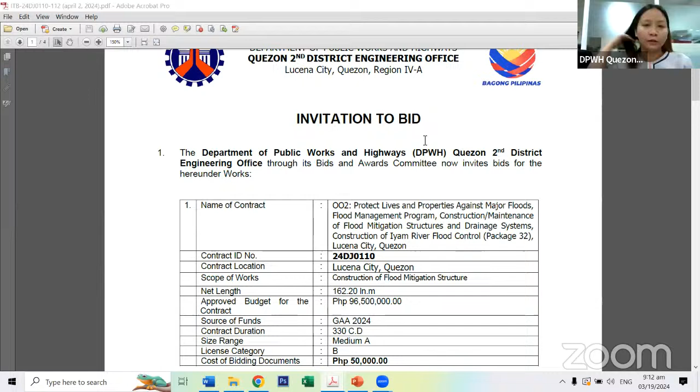Good morning again. First project, 002, Protect Lives and Properties Against Major Floods Management Program, Construction and Maintenance of Flood Mitigation Structures and Drainage Systems, Construction of Iyam River Flood Control, Package 32, Lucena City, Quezon. Contract ID number 24DJ0110. Scope of works: construction of flood mitigation structure.

Net length, 162.2 linear meters. Approved budget for the contract, 96,500,000 pesos. Source of funds, GAA 2024. Contract duration, 330 calendar days. Size range, medium A, license category B. Cost of bidding documents, 50,000 pesos.

Contract profile for 24DJ0110. Major categories of work are FCSPS, dimension 162.2 linear meters. Cost estimate for major category, 96,500,000 pesos. Similar major categories of work are RCSPS, FHR, PHC, FHD.

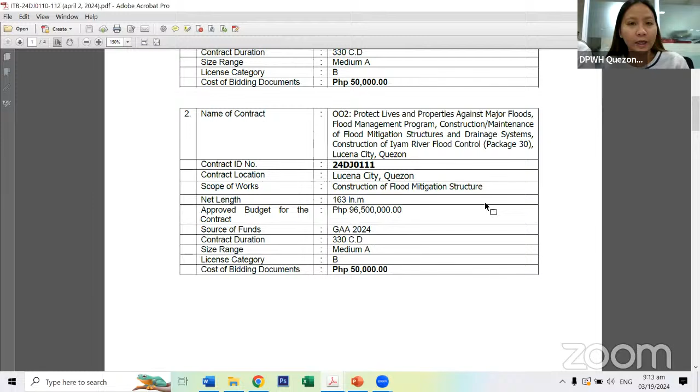Next project, 002, Protect Lives and Properties Against Major Floods, Flood Management Program, Construction Maintenance of Flood Mitigation Structures and Drainage Systems, Construction of Iyam River Flood Control, Package 30, Lucena City, Quezon.

Contract ID number 24DJ0111. Scope of works: construction of flood mitigation structure. Net length, 163 linear meters. ABC, 96,500,000 pesos. Source of fund, GAA 2024. Contract duration, 330 calendar days. Size range, medium A. License category B. Cost of bidding documents, 50,000 pesos.

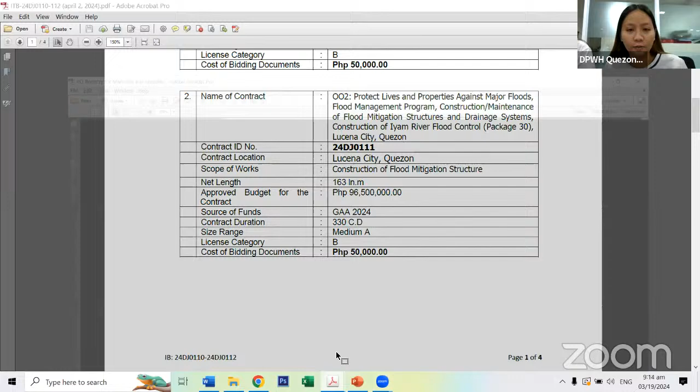Contract profile for 24DJ0111. Major categories of work, FCSPS. Dimension, 163 linear meters. Cost estimate for the major category, 96,500,000 pesos. Similar major categories of work: RCSPS, FHR, PHC, FHD.

Last project, 002, Protect Lives and Properties Against Major Floods, Flood Management Program, Construction Maintenance of Flood Mitigation Structures and Drainage Systems, Construction of Iyam River Flood Control, Package 31, Lucena City, Quezon.

Contract ID number 24DJ0112. Scope of works: construction of flood mitigation structure. Net length, 163 linear meters. ABC, 96,500,000 pesos. Source of fund, GAA 2024. Contract duration, 330 calendar days. Size range, medium A. License category B. Cost of bidding documents, 50,000 pesos.

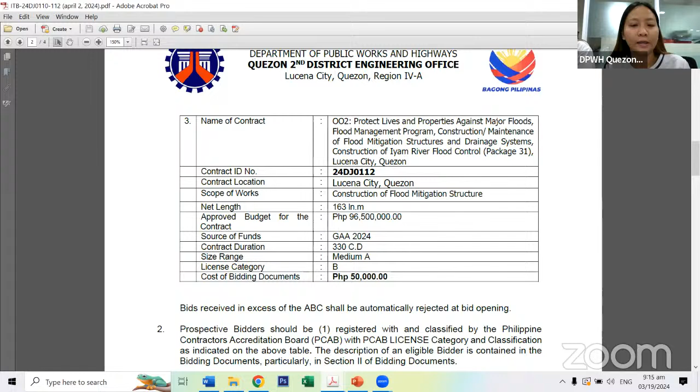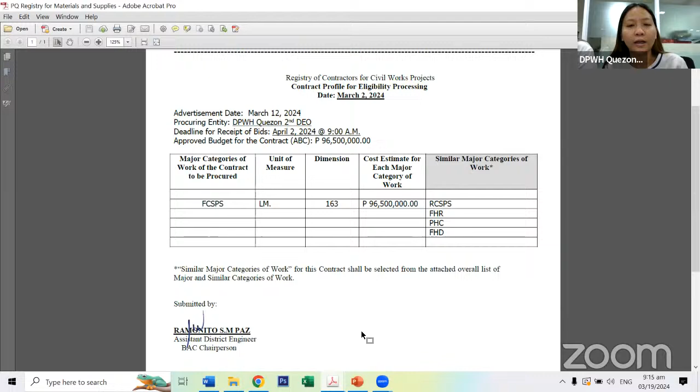Contract profile for 24DJ0112. Major categories of work, FCSPS. Dimension, 163 linear meters. Cost estimate for the major categories of work, 96,500,000 pesos. Similar major categories of work: RCSPS, FHR, PHC, FHD. Opening date, April 2, 2024 at 9 a.m.

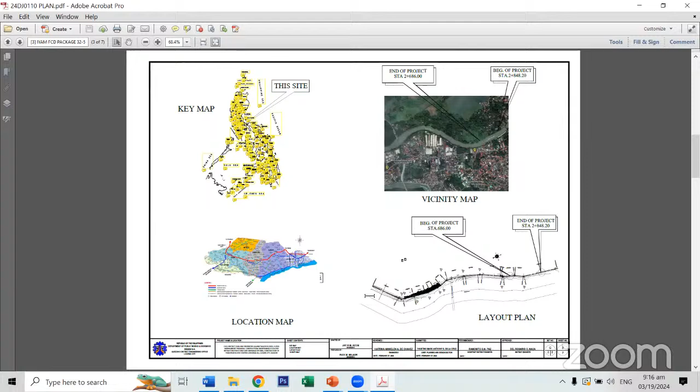The scope of works. Under Part A, facilities for the engineer, we have construction of field office for the engineer, provision of furnitures, fixtures, equipment, and appliances for the field office for the engineer, provision of field office staff for the assistance to the engineer, and provision of progress photographs.

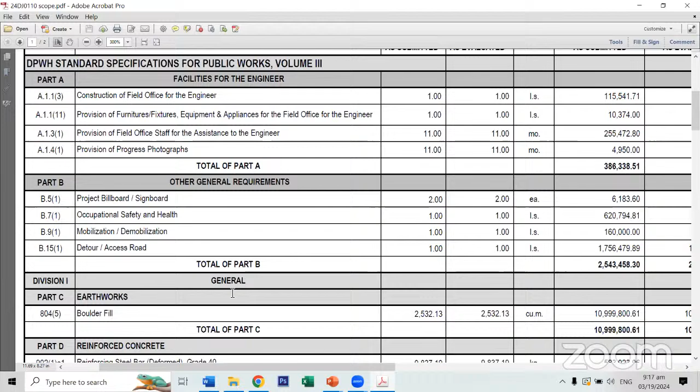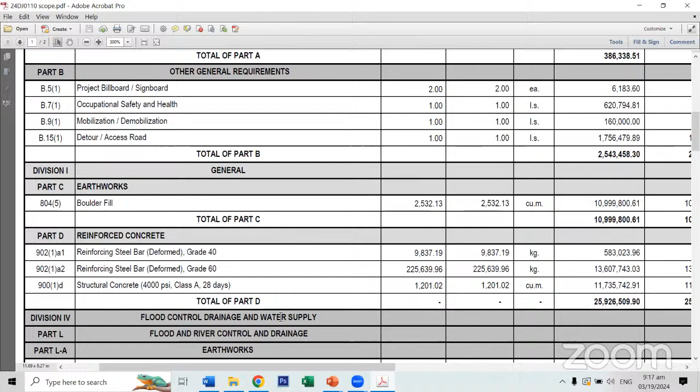Under Part B, other general requirements, we have project billboard, signboard, occupational safety and health program, mobilization, demobilization, detour access roads. Under Division 1, General, Part C, Earthworks, we have boulder fill.

Under Reinforced Concrete, we have Reinforcing Steel Bar Grade 40 deformed, and Reinforcing Steel Bar Grade 60 deformed, and Structural Concrete, 4,000 PSI, Class A, for 28 days.

Under Division 4, Flood Control, Drainage, and Water Supply, Part L, Flood and River Control and Drainage, Earthworks, we have clearing and grubbing, unsuitable excavation, structural excavation for common soil, gravel fill, shoring, cribbing, and drain excavation, cribbing, coffer damming, and embankment from borrow.

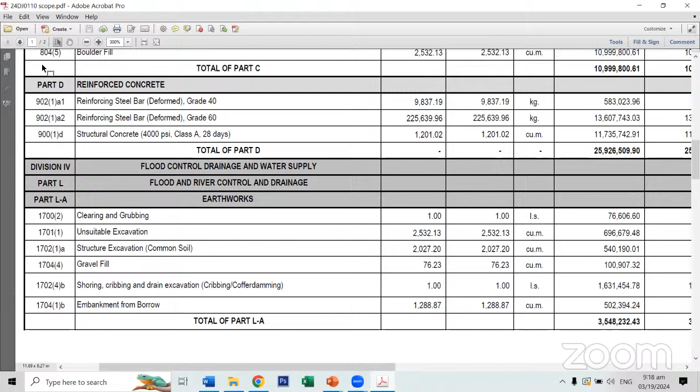For bank and slope protection, we have stone masonry, structural steel sheet piles furnished, and structural steel sheet piles driven. Under drainage work, we have pipe culverts, 910 millimeter diameter, Class 2 RCPC.

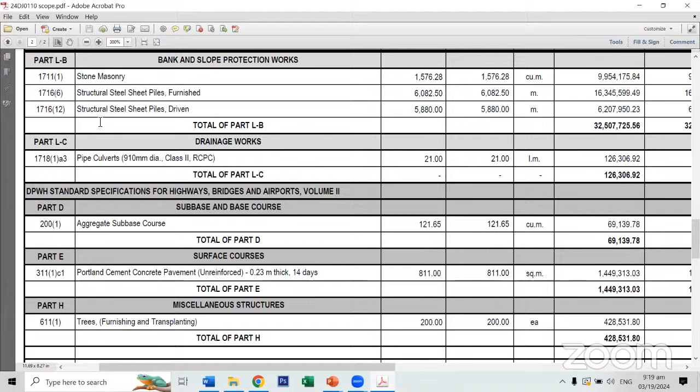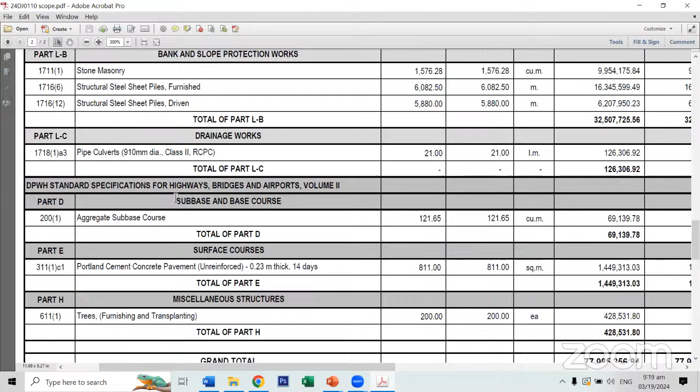Under sub-base and base course, we have aggregate sub-base course, and under surface courses, we have Portland cement concrete pavement unreinforced, 0.23 meter thick, for 14 days. Under miscellaneous structures, we have trees, furnishing, and transplanting.

The minimum equipment requirements: one backhoe, two dump trucks, one plate compactor, one cutting outfit, one water pump, 100 millimeter suction diameter, 2667 LPM, 16 horsepower, one water truck, one low bed trailer, one vibratory roller.

One bar cutter single phase, 25 millimeter, one motorized road grader, one bar bender, one welding machine, one cargo truck, one concrete saw, one generator set, one vibro hammer hydraulic operated, one truck mount and crane 45 metric tons capacity, one service crane 25 metric tons capacity, one concrete vibrator, one concrete screeder 5.5 horsepower, one payloader, and one crawler crane.

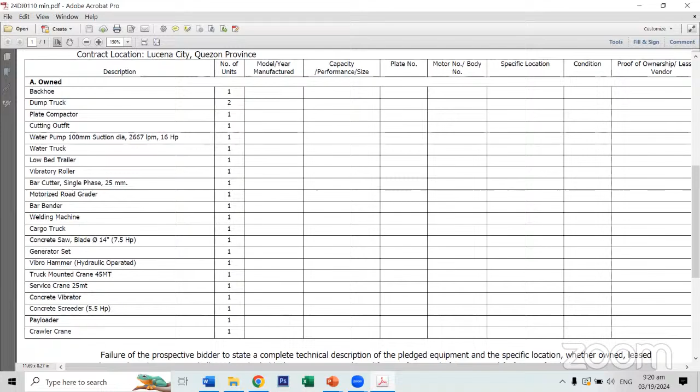For the manpower requirements, we need one project manager, one project engineer, one accredited materials engineer, one construction foreman, a first aider, and a safety officer.

The approved budget for the contract is 96,500,000 pesos, and the contract duration is 330 calendar days.

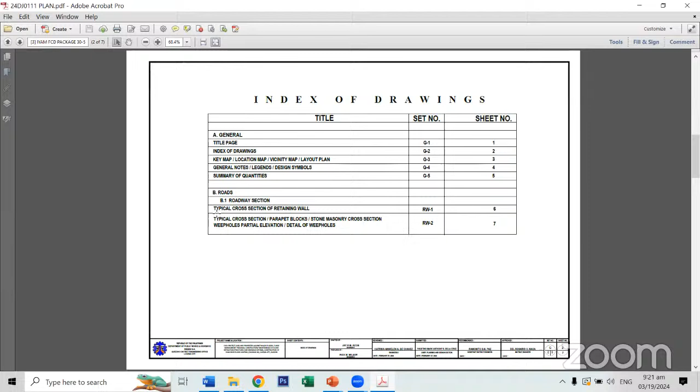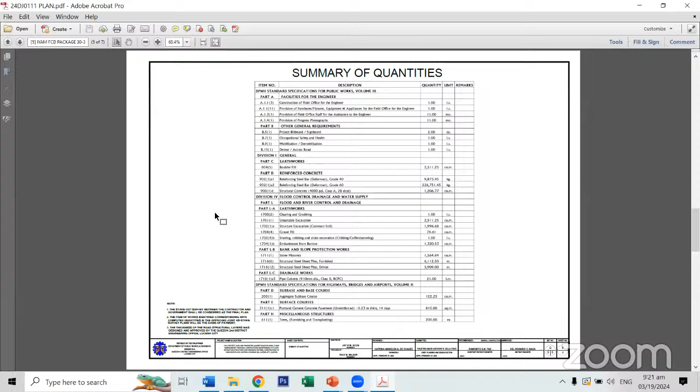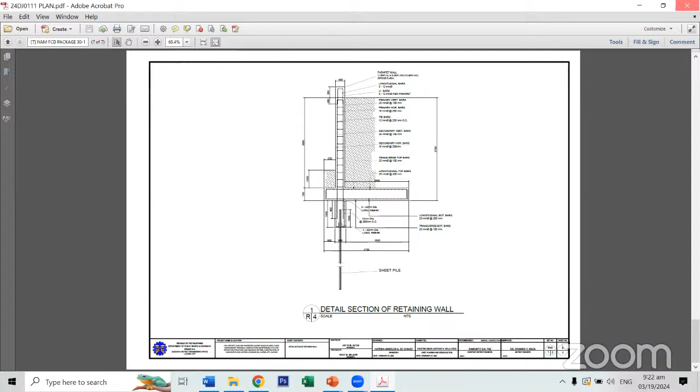This page shows the detail section for retaining wall. Scope of works.

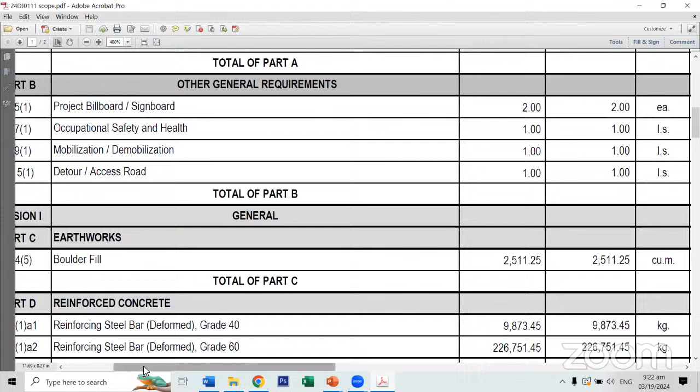For scope of works, Part A, the facilities for the engineer, we have construction of field office for the engineer, provision of furnitures, fixtures, equipment, and appliances for the field office for the engineer, provision of field office staff for the assistance to the engineer, and provision of progress photographs.

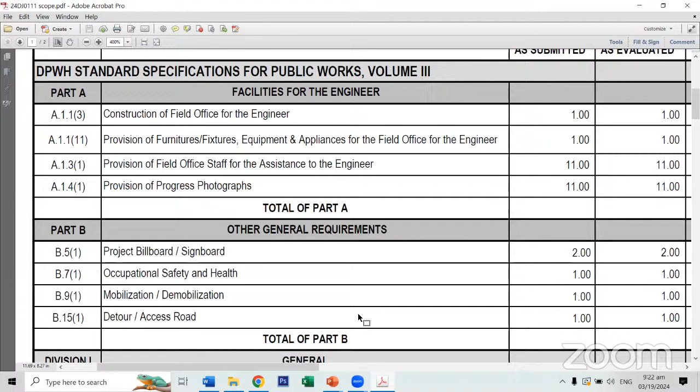For other general requirements, we have project billboard signboard, occupational safety and health, mobilization, demobilization, and detour access roads.

Under Division 1 General Part C Earthworks, we have boulder fill. Under reinforced concrete, we have reinforcing steel bar grade 40 deformed, reinforcing steel bar grade 60 deformed, and structural concrete 4000 psi Class A for 28 days.

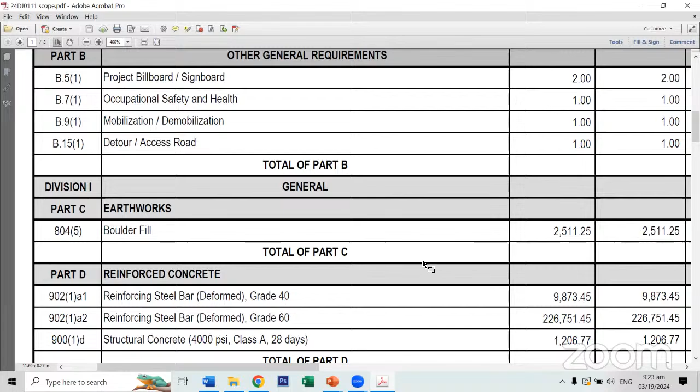Under flood control, drainage and water supply, flood and river control drainage earthworks, we have clearing and grubbing, unsuitable excavation, structure excavation for common soil, gravel fill, shoring, cribbing, and drain excavation for cribbing, coffer damming, and embankment from borrow.

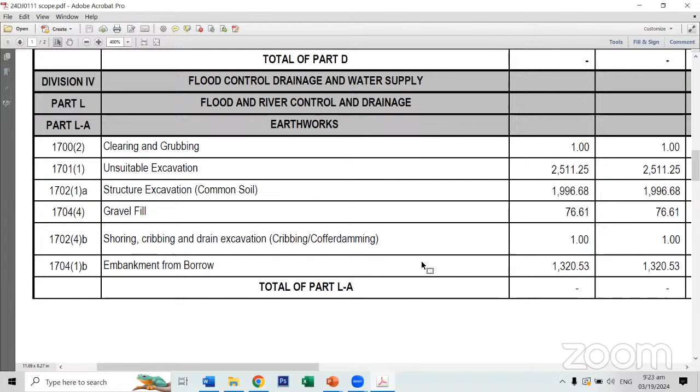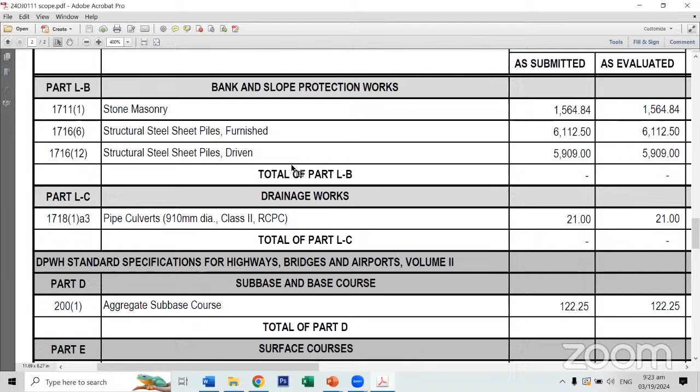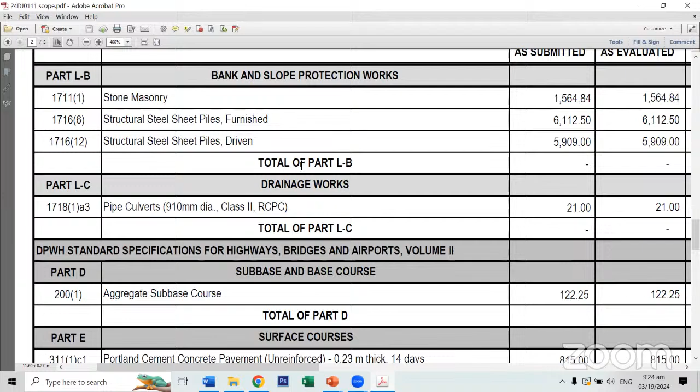For bank and slope protection works, we have stone masonry, structural steel sheet piles for furnish, and structural steel sheet piles driven. Under drainage works, we have pipe culverts, 910 millimeter diameter, Class 2 RCPC.

Under sub-base and base course, we have aggregate sub-base course. Under surface courses, we have Portland cement concrete pavement, unreinforced, 0.23 meter thick, 14 days. And for miscellaneous structures, we have trees, furnishing, and transplanting.

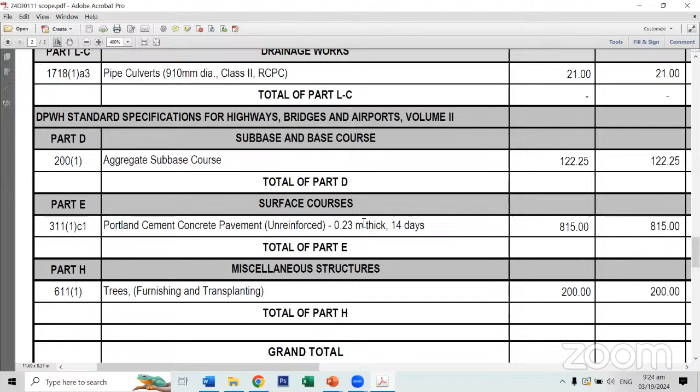The minimum equipment requirements for this project, 24DJ0111: one backhoe, two dump trucks, one plate compactor, one cutting outfit, one water pump 100 millimeter suction diameter, one water truck, one low bed trailer, one vibratory roller.

One bar cutter single phase 25 millimeter, one motorized road grader, one bar bender, one welding machine, one cargo truck, one concrete saw, one generator set, one vibro hammer, one truck-mounted crane 45 metric tons capacity, one service crane 25 metric tons capacity, one concrete vibrator, one concrete screeder at 5.5 horsepower, one payloader, and one crawler crane.

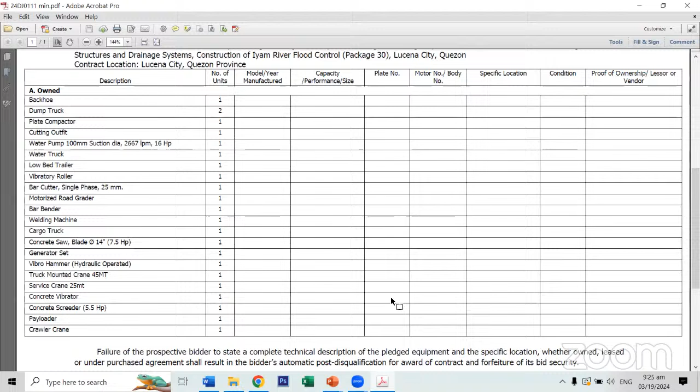For the manpower requirements, we need a project manager, one project engineer, an accredited materials engineer 1, a construction foreman, one first aider, and one safety officer.

The approved budget for the contract is 96,500,000 pesos, and the contract duration is 330 calendar days.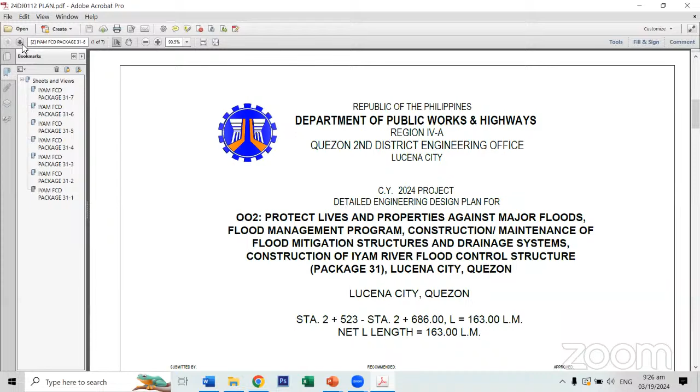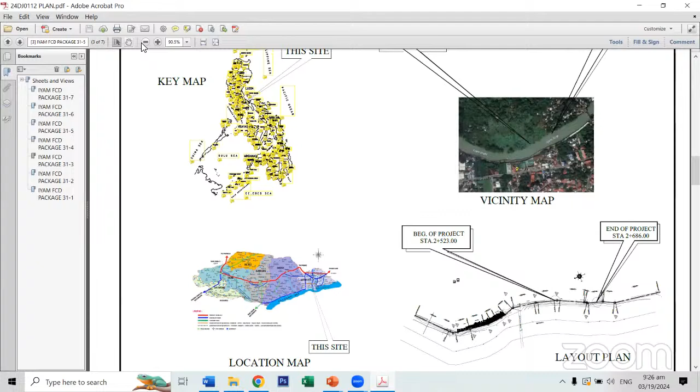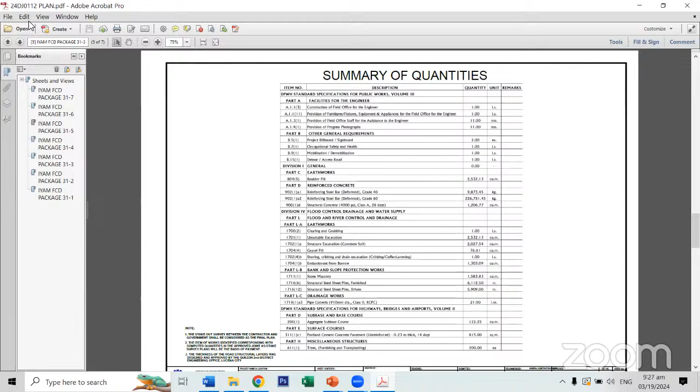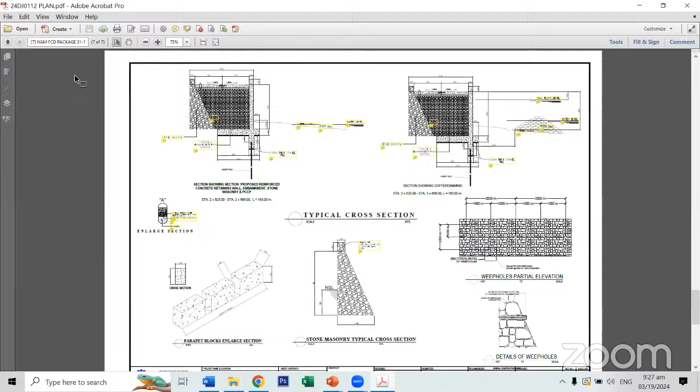This page shows the detail section of retaining wall. This page shows a typical cross-section for stone masonry, typical cross-section, parapet blocks enlarge section, the weep holes partial elevation, and the details of weep holes.

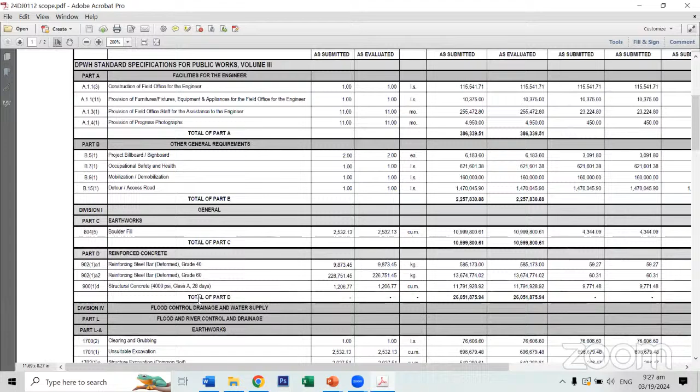For the scope of works, under Part A, Facilities for the Engineer, we have construction of field office for the engineer, provision of furnitures/fixtures, equipment, and appliances for the field office for the engineer, provision of field office staff for the assistance to the engineer, and provision of progress photographs.

For other general requirements, we have project billboard, signboard, occupational safety and health, mobilization, demobilization, detour access roads. For earthworks, we have boulder fill.

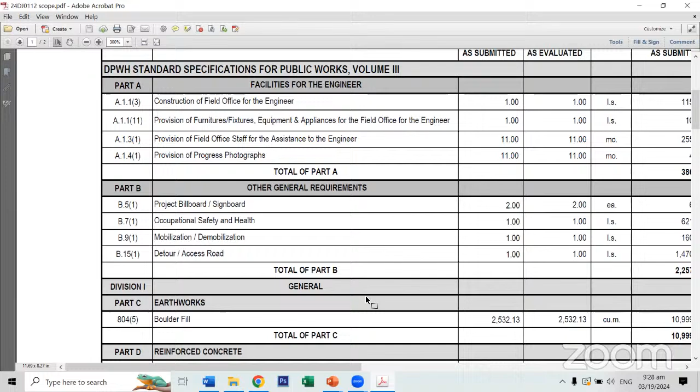For reinforced concrete, we have reinforcing steel bar, grade 40, deformed, reinforcing steel bar, grade 60, deformed, structural concrete, 4,000 psi, class A, 28 days.

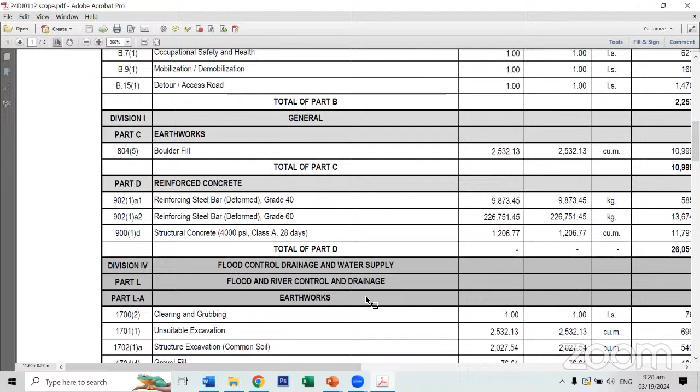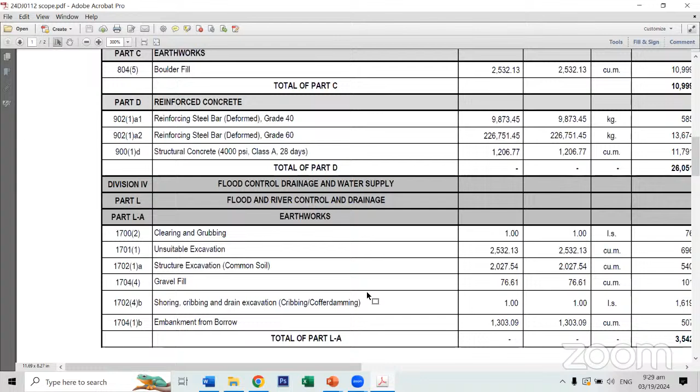Under earthworks, we have clearing and grubbing, unsuitable excavation, structure excavation for common soil, and gravel fill. We also have shoring, cribbing, and drain excavation, cribbing, coffer damming, and embankment from borrow.

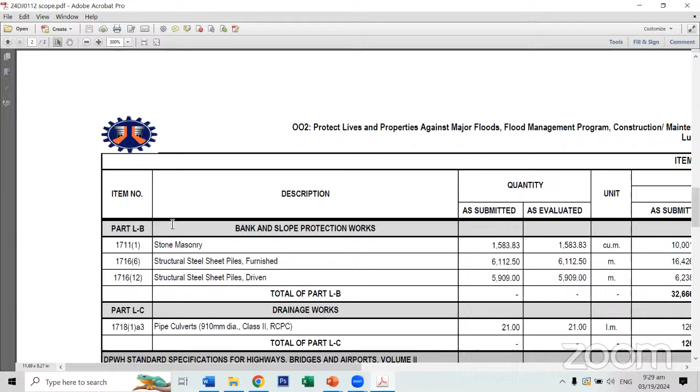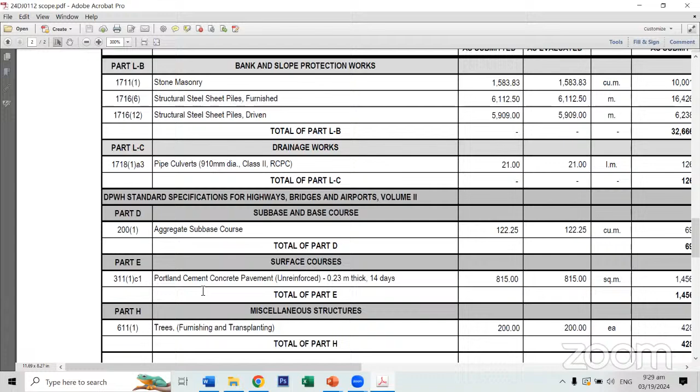Under bank and slope protection works, we have stone masonry, structural steel sheet piles furnished, and structural steel sheet piles driven. Under drainage works, we have pipe culverts, 910 millimeter diameter, class 2, RCPC. Under subbase and base course, we have aggregate subbase course. Under surface courses, we have Portland cement concrete pavement, unreinforced, 0.23 meter thick, 14 days. And under miscellaneous structures, we have trees, furnishing, and transplanting.

The minimum equipment requirements. For this project, the minimum equipment requirements is 1 backhoe, 2 dump trucks, 1 plate compactor, 1 cutting outfit, 1 water pump 100 millimeter suction diameter 2667 LPM 16 horsepower, 1 water truck, 1 low bed trailer, 1 vibratory roller, 1 bar cutter single phase, 1 motorized road grader, 1 bar bender, 1 welding machine, 1 cargo truck, 1 concrete saw, 1 generator set, 1 vibro hammer hydraulic operated, 1 truck-mounted crane 45 metric tons capacity, 1 service crane 25 metric tons capacity, 1 concrete vibrator, 1 concrete screeder at 5.5 horsepower, 1 payloader, and 1 crawler crane.

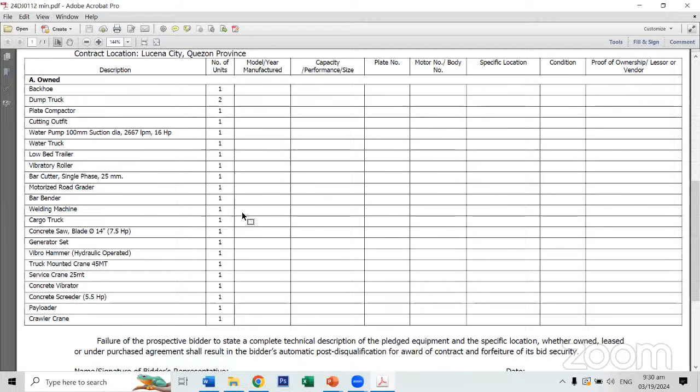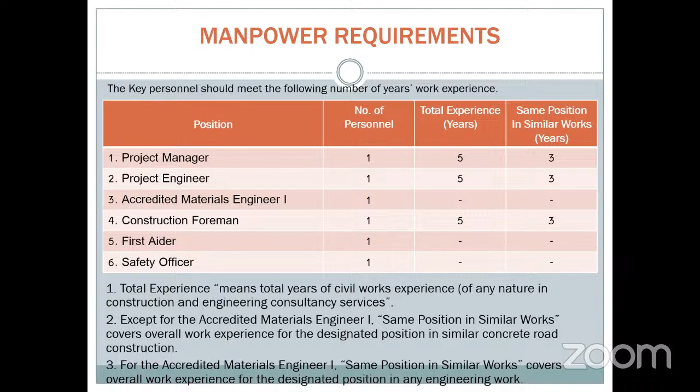For the manpower requirements, this project needs one project manager, a project engineer, an accredited materials engineer 1, a construction foreman, one first aider, and one safety officer. The approved budget for the contract is 96,500,000 pesos, and the contract duration is 330 calendar days.

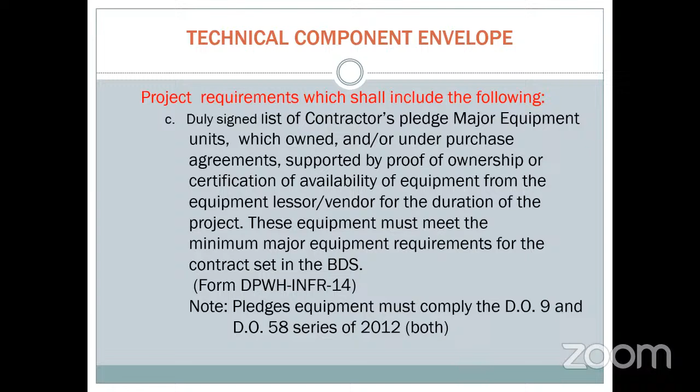C, the duly signed list of contractor's pledged major equipment units, which own and/or under purchase agreement, supported by a proof of ownership or certification of availability of equipment from the equipment lessor or vendor for the duration of the project. This equipment must meet minimum major equipment requirements for the contract set in the BDS, form DPWH Infra 14, and take note that pledged equipment must comply with DO number 9 and DO number 58, both series of 2012.

D, the original duly signed omnibus sworn statement in accordance with Section 25.3 of the IRR, and E, if applicable, original notarized secretary's certificate in case of corporation, partnership or cooperative, or original special power of attorney of all members of the joint venture, giving full power and authority to its officer to sign the OSS and do acts to represent the bidder.

For Class B documents, if applicable, duly signed joint venture agreement in accordance with RA number 4566 and its IRR, in case the joint venture is already in existence.

The checklist of the financial component, envelope, the second envelope. The financial proposal shall contain the following.

A, original duly signed and accomplished financial bid form. 2, original of duly signed bid prices in the bill of quantities, form DPWH Infra 16 and 17.

Number 3, the duly accomplished detailed estimate form, including summary sheets indicating the unit prices of construction materials, labor rates, and equipment rental used in coming up with the bid. And 4, duly signed cash flow by quarter using form DPWH Infra 18.

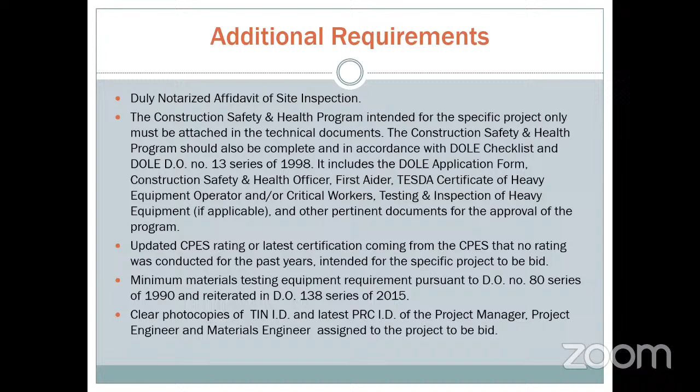As per 2006 criteria of eligibility screening, preliminary examination of bids, evaluation of bids, and post-qualification. As per the 2016 revised IRR of RA 9184, the latest GPPB issuances, the first envelope shall be opened to determine compliance with the documents required to be submitted for eligibility and for the technical requirements as prescribed in the IRR. The BAC checks the submitted documents of each bidder against the checklist of requirements to ascertain if they are all present using the pass-fail criterion. For every document required that is present, it shall be rated pass. But in case of failure to include any of the requirements resulting in incomplete required documents, it shall be considered failed.

Otherwise, the BAC shall rate the first envelope pass. Immediately after determining the compliance of the first envelope, the BAC shall open the second envelope or the financial documents, using again the pass-fail criterion in determining compliance based on the checklist requirements. When the bid price exceeds the approved budget for the contract or ABC, it is automatically rated as failed. All bids shall be subject for evaluation, and the lowest calculated bid or the highest rated bid shall undergo post-qualification to determine whether the bidder concerned complies with and is responsive to all the requirements and conditions as specified in the bidding documents.

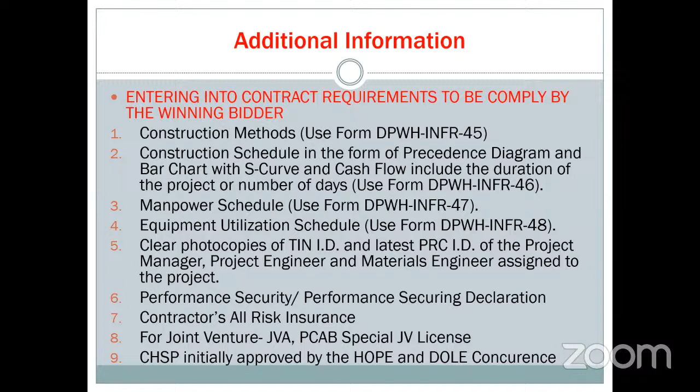Reminder to bidders who will submit manually and to bidders who submitted their bids online that they will submit the original documents. Submit documents with table of contents, paginated and book-bound with ear tags pursuant to DO number 90 series of 2002. The proposal booklet should be signed and attached in the technical envelope. There should be a documentary stamp on the bidder's bond and all other notarized documents. The materials engineer should be accredited and the certificate of accreditation should be updated, intended for the specific project. The estimate and the summary sheet must be in detail. The contractor's authorized representative must present their valid company ID and any government-issued ID.

Reminder to all bidders, please use A4 size bond paper for the technical and financial bid proposal. Use the prescribed infra form which can be found in the bid proposal booklet updated March 31, 2021. DO 35 series of 2008, the guidelines in the implementation of the three-strike policy in procurement of civil works and consultancy services contracts by the department, and reiterated in DO number 17 series of 2015, the three-strike policy in the procurement of contracts for infrastructure works, goods, and consulting services.